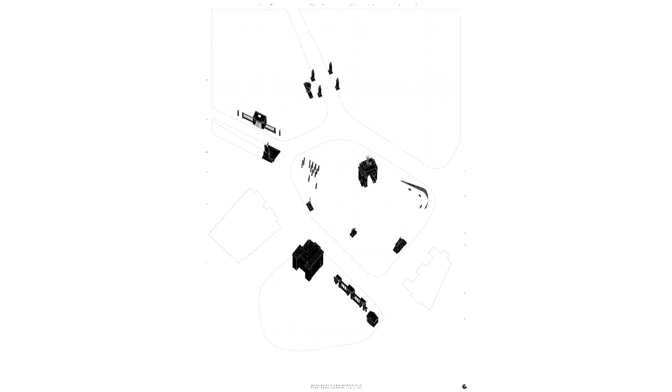So my project is called the Centre for Public Integrity. It is an addendum to existing monuments of the site of Hyde Park Corner. The public building is at risk of disappearing from London. So what I am proposing is essentially a monument to the public building that starts to associate with the monuments of this site.

It is a bit inaccurate to say that my proposal is an addendum because I don't have any past work to lean on.

And what I have done to kind of justify why it is an addendum is, first of all, I've kind of appropriated some citizenship as a Londoner, and I'm arguing that whenever I'm operating in the public space, I can to some extent be credited as an author because I'm on a regular basis contributing and shaping the community that I'm in. So I have some kind of authorship over the public sphere.

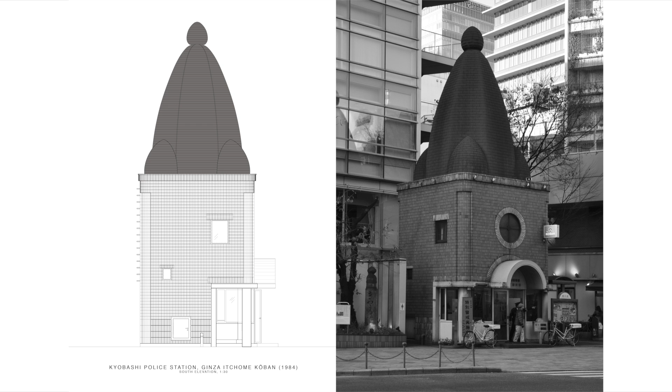The second point I'm trying to make for why this is an addendum is because, in its shape and form, this building, this monument to the public, is very much related to research I did in Tokyo in second term, where I looked into a certain typology of small police substations that are kind of omnipresent in Tokyo, and that are more than being police stations carrying out the role of policing, of surveillance.

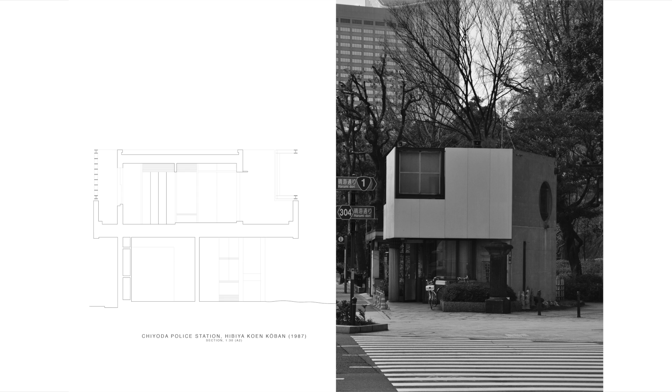They are signifiers of public space, and they are constant reminders for the Japanese citizens of a thing called public territory. I'm very influenced by the eclecticism of the Koban.

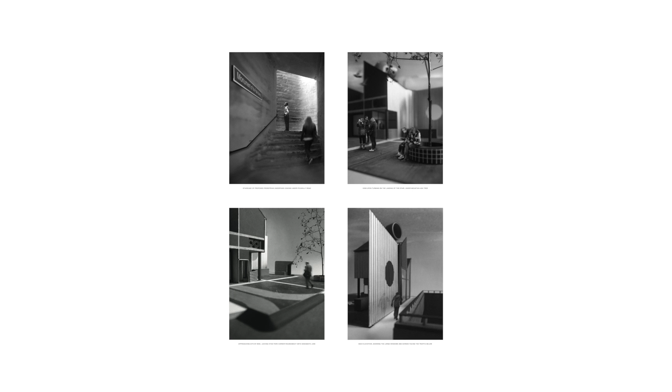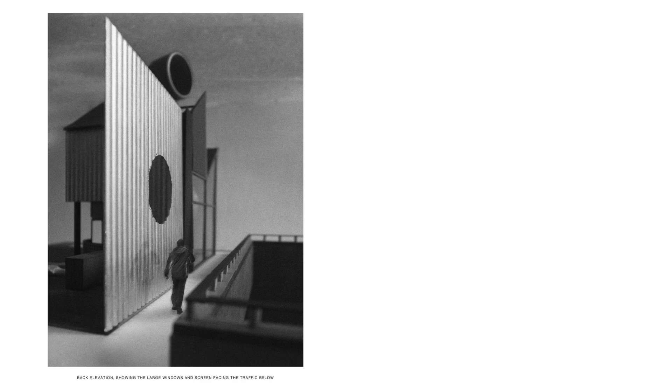It's a way of framing this site using building components, in a collection of monuments that are commemorative of that which is disappearing.

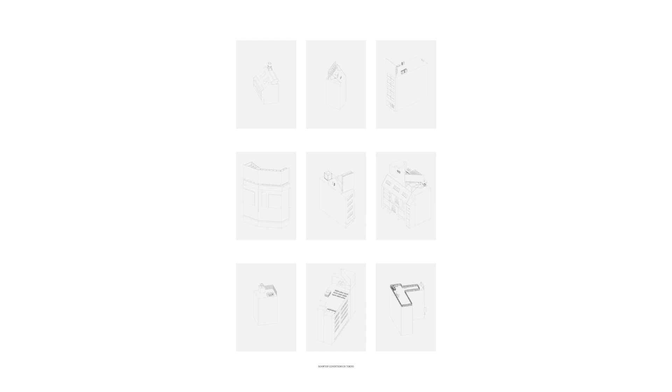So in Tokyo, I was looking at these billboards on the rooftops of buildings, and I call them hats, because when you add a hat to a person... can I borrow your hat?

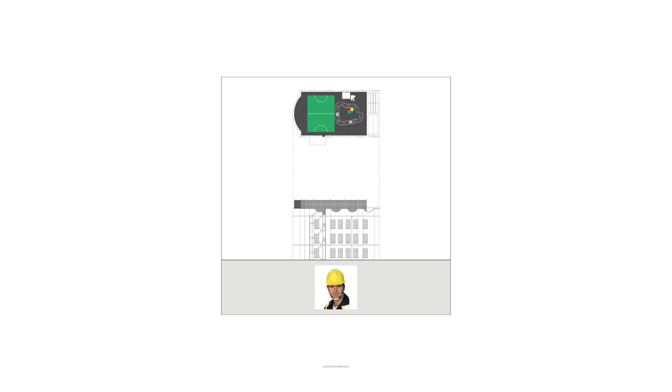So in London, I don't have one specific site, but I just looked into the rooftops, which I then add a hat to, to activate the existing building, which is very ordinary and has got no character.

But by adding a hat, they become something else. So my addendum is about activating the existing, giving a new meaning.

For instance, the bakery building is in the shape of a cigarette box, and people think, why is the cigarette related to the bakery? And this weird association leads people to somewhere else.

My whole project started with the quote from Hawksmoor describing London as an ugly, inconvenient, self-destroying monster. And I thought, it's not really a matter of questioning whether something is ugly or beautiful, but nowadays it's more about if things are worth talking about.

So my hat is a device that generates a conversation.

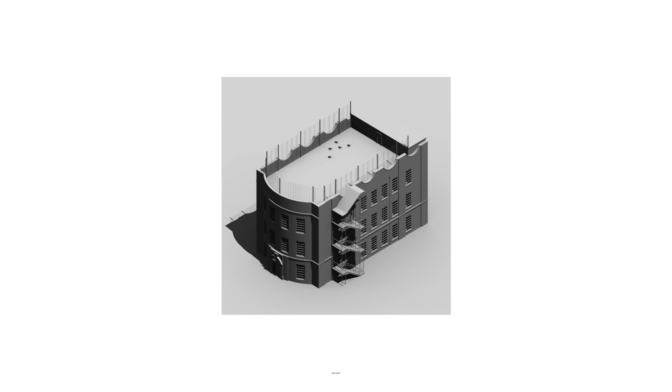But what I found more interesting about them is that because there are so many of them, the majority of buildings have hats, so they form this group in the city. I saw two different buildings which had the same advertisement on their billboard, and I thought, are they somehow related in terms of what they have in the building?

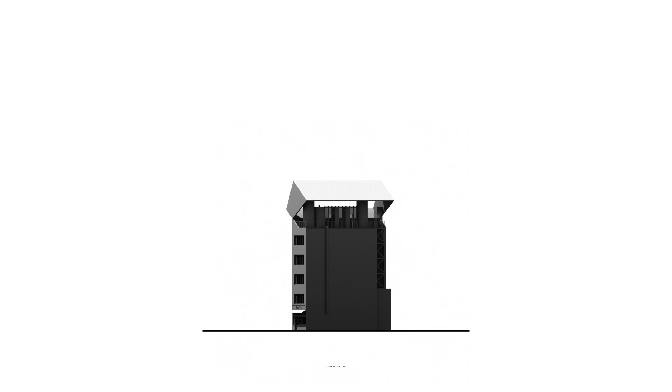So in a way I did the same in London, where I created not just one hat, but a series of them, so they formulate a link between them because all of them are in the shape of a recognizable product.

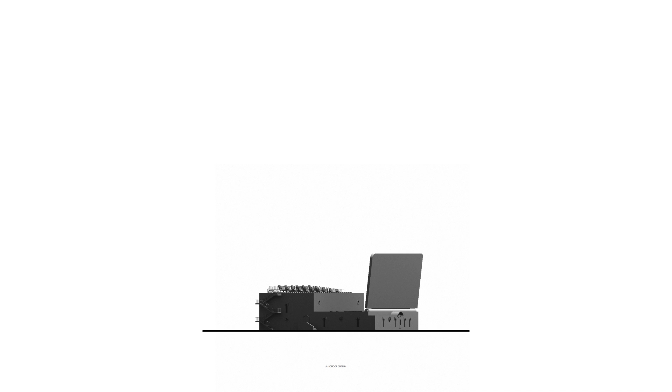So these forces are joined together to fight against St. Paul's Cathedral, which is kind of like a king in London. It dominates the entire area with its regulations.

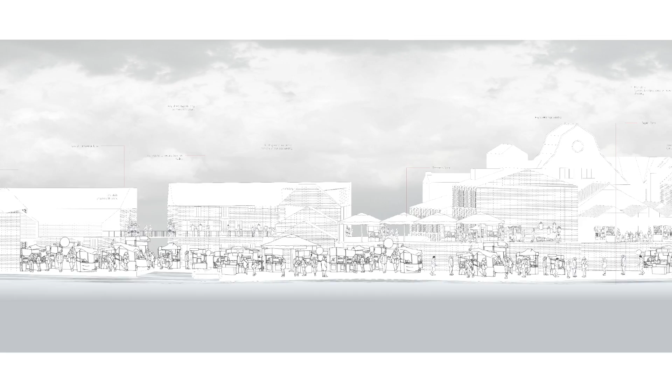Okay, so my site is the Camden Market, mainly Camden Lock Market in Camden, and this is the start point, the Camden Market is born. That's the root of the Camden Market, and I'm focused on the current situation of the market in London. It's like copy and paste, repetitive conditions, so they're exchangeable.

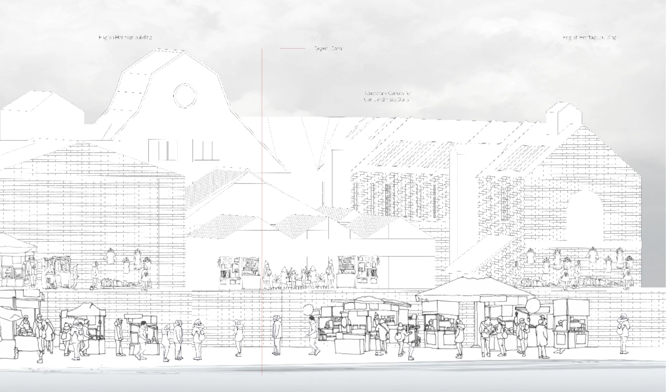So I want to give a specific character for the market. Mainly they disrupt the market character by the stall, so my idea is removing the stall from the market. Removing is one of the key points of my addendum, and making an empty square where the stall used to be occupied.

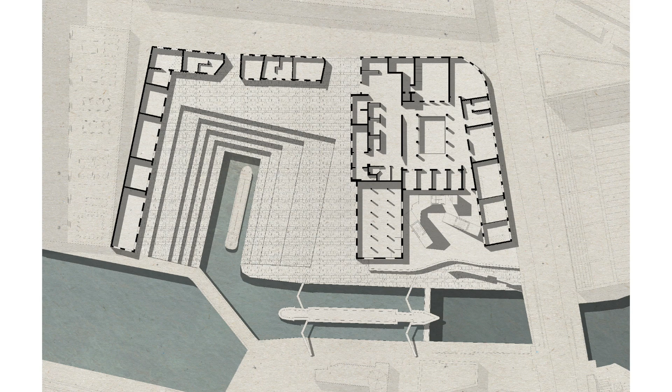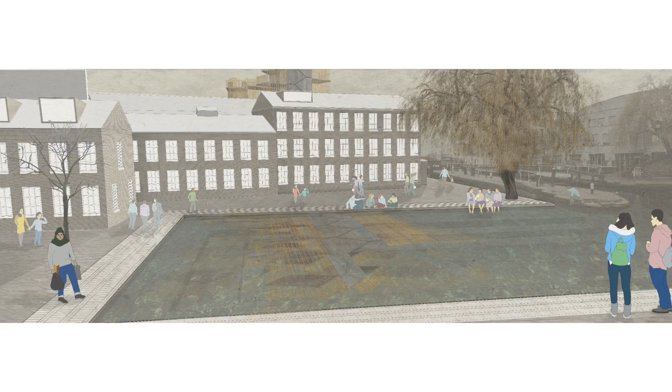I replaced the stall into the tiny empty spaces which they didn't use, so I'm reusing the empty space for the stall. I'm creating a tower for the stall, which exists on the Camden side, and also making a square returning the empty space to the Camden residents.

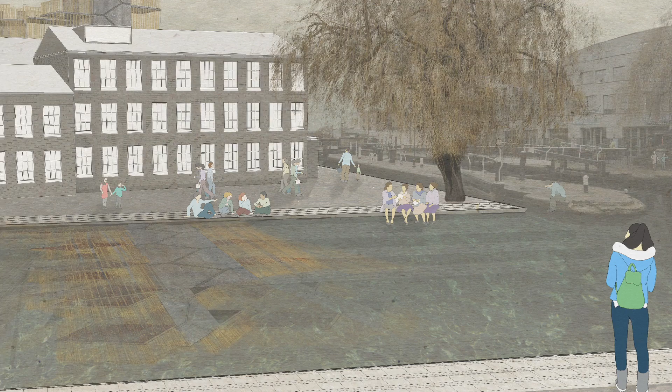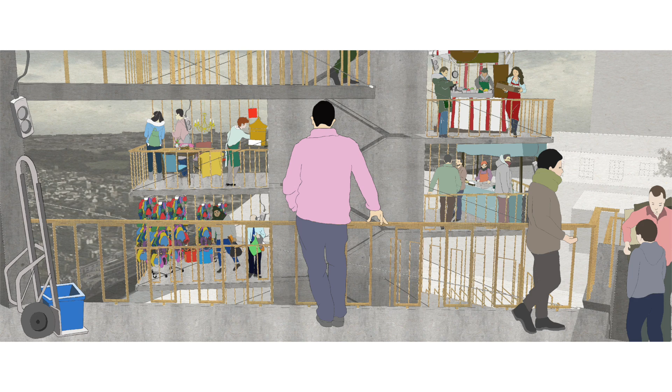The stall tower actually brings all the market activity into the tower. So mainly London market is a horizontal market, but I make a horizontal market turn into vertical. It's a vertical condition, but it clearly has the outdoor market condition that London markets usually have, so they can feel the weather, like rain and sun, and also see day and night time. Then they can attract other stores on different floors, bringing all the market conditions into it.

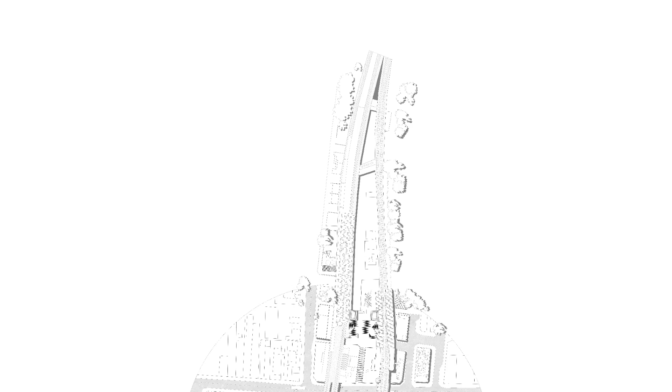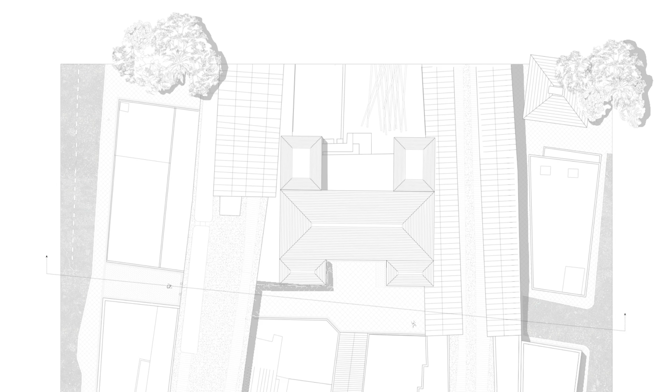My site is Peckham, and it's the enclosure of the viaducts which encloses the station, Peckham Station, and I'm taking the station as kind of a pulling machine for people to come into Peckham. At the end I demolished a building that was in front of the station to give the area more space. Which is funny, because at the beginning I was finding the difference between addition and addendum.

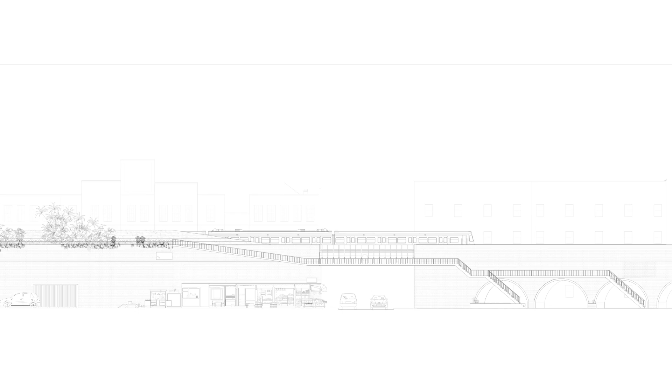So I was always thinking about the addendum as an addition in that sense, but at the end I figured it's more of a theory, and the result that comes out of it is the addendum - so me giving more space to the people.

So I think from the old building that has been there, taking the staircases and forming new connections to the Peckham Coal Line, which eventually would then go to Queens Road.

For example, I had the example of the Reichstag in Germany, where the dome has been renewed, and I see the renewing of the dome as an addendum and not an addition, because it's adding another function to it, for people to have another view inside what is happening.

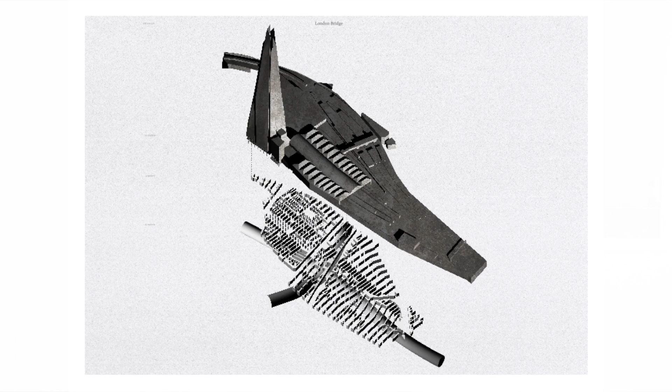What I'm then altering is simply the program and the architecture that sits on top of that. One of the most important components of this addendum proposal is the aspect of time and the arrangement of different programs based on their endurance.

The two biggest changes are how you move at two different speeds. There's a ramp, situated directly next to the escalators, that either allows you to enter or exit, and this ramp begins to circulate up through the 7 stories of the building.

In addition to this, there are also express cores, which then allow someone who has a particular intention, for example to visit the cinema directly, or the workstation directly, or something specific. They are then allowed to move much faster through the space and have to interact with less.

On top of this, the arrangement of the floors has express and shorter endurance elements programmed to the bottom of the building, because it wouldn't be worth your time to go to the top and back down just to get a newspaper or coffee, whereas you would go to the 8th floor to visit the gym, go to the nightclub, or enter the hotel core.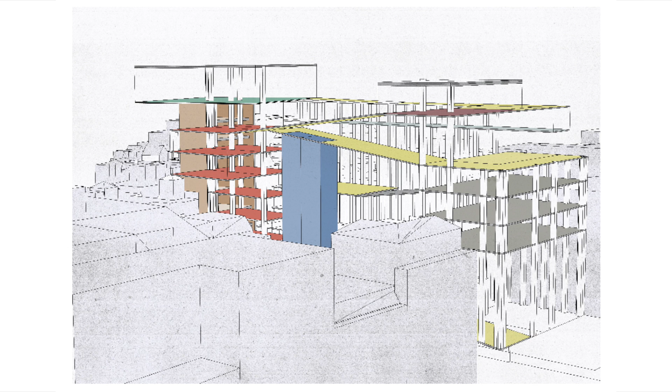So there's this variety of elements that are constrained by elements of time, speed and endurance, and programmed throughout this space.

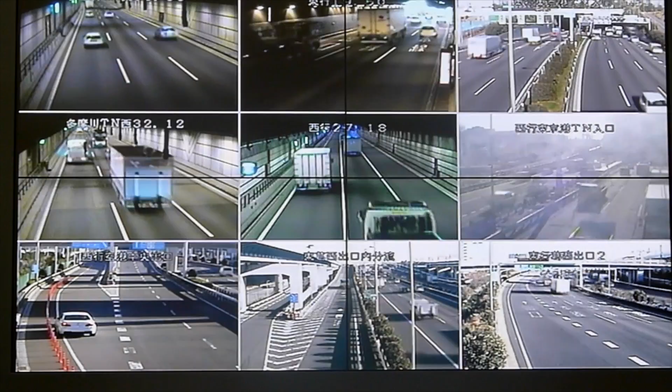In Tokyo, I was quite attracted by junctions between different types of infrastructure, and the way these confluences come together, the treatment of these junctions, and the effect it has on the commercial and residential buildings that surround the junction. So my three cases are Sangabashi, Ginza, and Shinjuku.

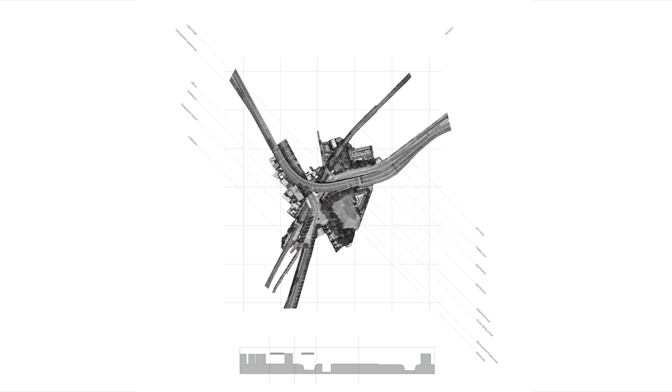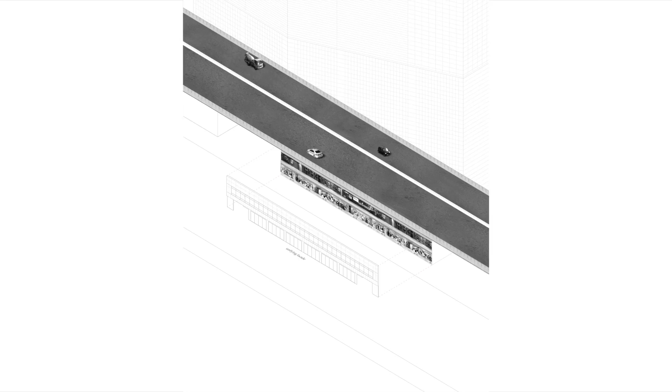My argument is that in the situation of conflict typified by Sangabashi, we end up with spaces which are much more generous, whereas in Shinjuku, for example, there's no such thing as a normal level ground plane, and everything, the materiality of the spaces and the nature of the spaces, are all normalised. They become the same.

So the proposal is an under and overground railway station which serves to activate a true public space on the South Bank. The station is a singular point where different infrastructural systems collide and produce a large void, a pocket of low pressure on an increasingly dense site.

Above is the Southeastern Railway, below is the Northern and Bakerloo lines, and on ground level you have the South Bank itself, the ground plane. So you have these three different scales converging at one point: the national scale above, the London scale below, and on the ground something very local — Royal Festival Hall, the Shell Centre, the market, etc.

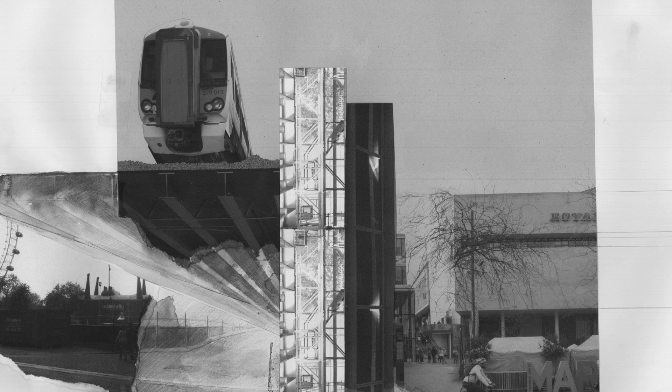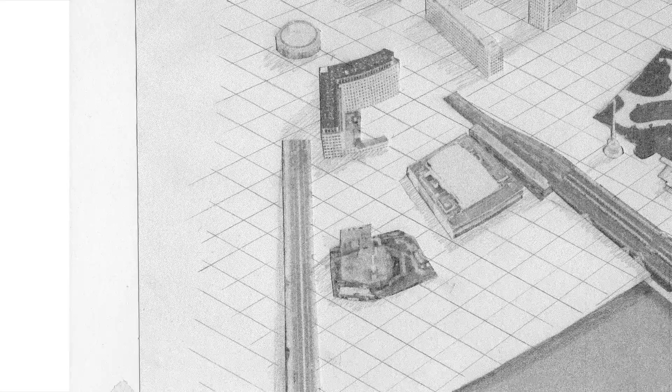The idea is that the status of the public void as an integral infrastructural core is a kind of strategy so that it is inherently resilient to further privatisation and development. The project is moving to this site, which is ambiguous in ownership, to really activate that lingering sense of publicness which the South Bank has slowly been losing.

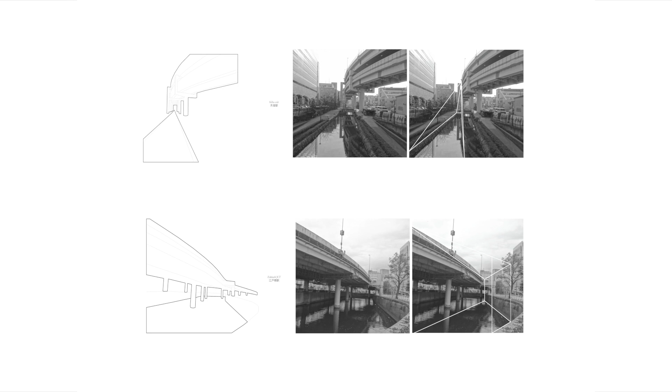Basically, I'm working with a highway, and what I did is insert the highway into central London, following the line of Regent's Canal.

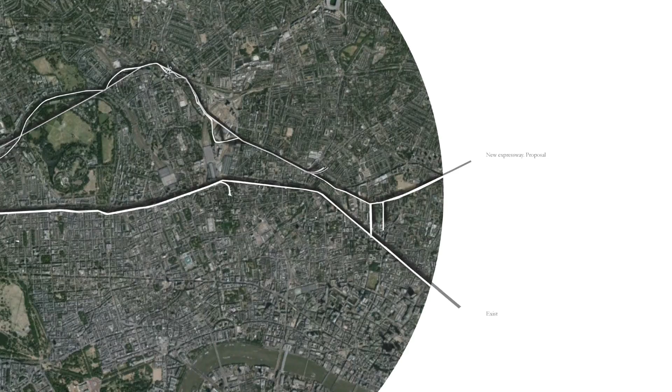But the most interesting part is the places which don't fit to the canal, because there are collisions with the actual city. So at this scale, I start looking at how exactly it affects the city when the expressway collides with the city.

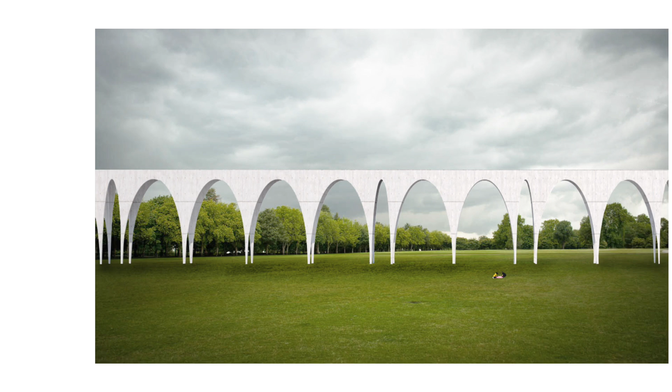For my design, I wanted to have a continuous shape, so that it could create a recognizable element in the city. But I did change it a bit with small arches, which could adjust the place where the base actually sits.

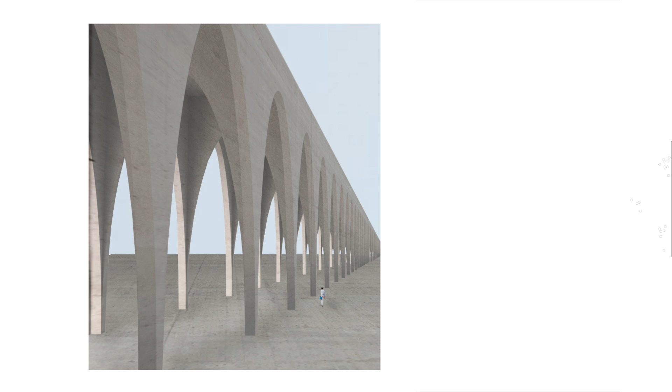I think it's a pure addendum — something that this insertion could create. First of all, it enhances the city because it helps the traffic, the time on the road every day, which is a real problem in London. Second, it's affected at every single scale, in an urban scale, in an architectural scale, and the insertion is just a pure addition to the city.

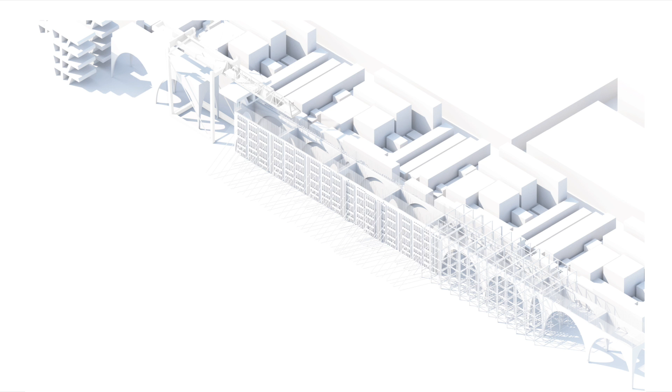My site is Oxford Street. I chose it because it was a comparison to the Harajuku-dori Avenue in Tokyo, and it's two kilometers long. It's built with shops, as you know.

What the addendum does to the site — the purpose of the addendum was to be so different from the site in materiality and form, to be completely different from the host, which was the site. So to be something that could be completely distinguished from the host in that way, and also to respond to an omission in London. That was the purpose of my addendum.

So what the addendum does to this site is first of all fill a gap which I think is in London. My mountain responds to the omission that there are no peaks higher than 98 meters in London.

It basically transforms the city and the site as well, the addendum. It blocks Oxford Street completely — the mountain completely blocks Oxford Street. Oxford Street basically doesn't exist anymore. So the site dissolves into the addendum completely.

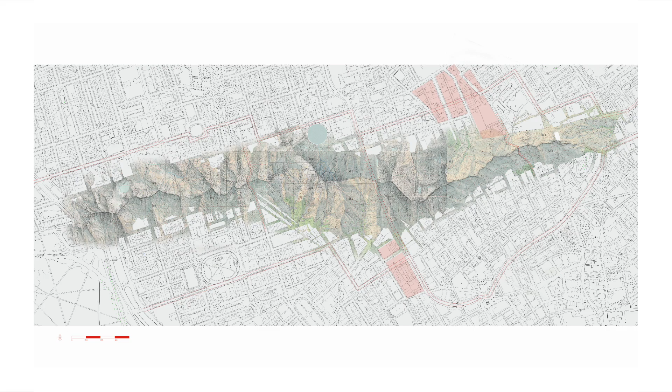My addendum is so big that it affects the city overall as well. So I can't say it just changes Oxford Street in a way — it really changes the whole area of London, transforms the city. To me, an addendum is something that's separate from the host, that can be distinguished from the host completely. That's why it's a mountain, because it's so different from the context of London that anywhere it would stand out.

You wouldn't be able to say, okay, where is the addition? You know that this is the added part. So I can't say that the buildings around it are additions to the mountain. I think the mountain is an addition to the city completely.

I say it dissolves. I think Oxford Street disappears into the mountain completely, but I'm not saying that. I'm saying something completely against this, that in no way my mountain blends into the city. It's completely standing out in the city.

The mountain represents something that could take you away from the rationalism and materialism of the world. That's what I actually learned from Bruno Taut, that the mountain, he thinks mountain can do that.

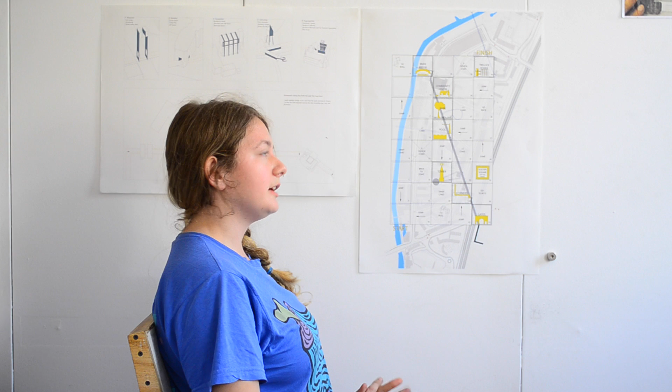So my site is located in Notting Hill, that is closed off by the train tracks and the canal, and which actually isolates the whole area and makes it really undeveloped and completely unusable, most of the area.

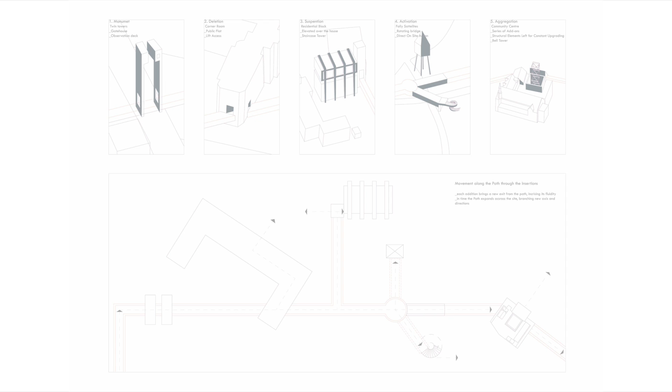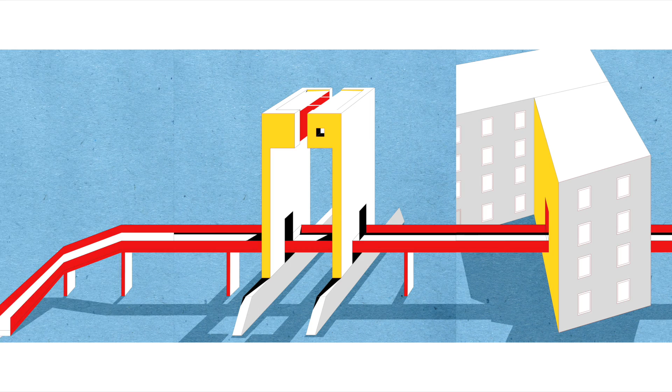And my addendum is actually the insertions that will bring more attention to the area but still keep its autonomy, which I decided to make through layering out the system, the grid, which eventually developed into a game to position those insertions. So the insertions happen, the addendum actually happens randomly without specific reasoning for it, although the game still controls the ways and positioning of them and brings the reason justifying the addendum to happen.

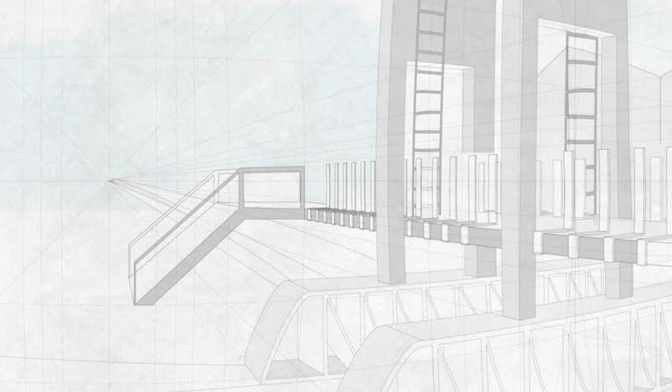What is also interesting is that these additions rely on the materials and elements that exist on the site, so I'm not taking any other forms but only those that are already in this archipelago. And the addendums that I'm proposing for those, they're not really finished ones, they still allow for future development, progression to happen.

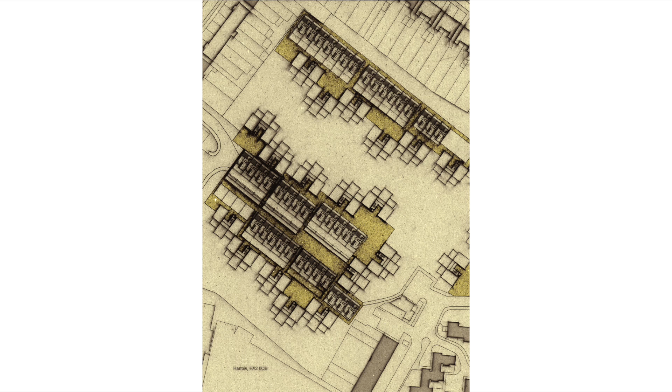My site is in Harrow, and I was dealing with the regeneration of a housing estate. It's one of the many housing estates in London that was announced to be demolished. Housing estates in general was a typology that I was dealing with - that was my understanding of Addendum.

I chose to be - my understanding was Addendum as a repair. And council estates as a typology, I believe, is a perfect architectural example to practice this architecture of repair on.

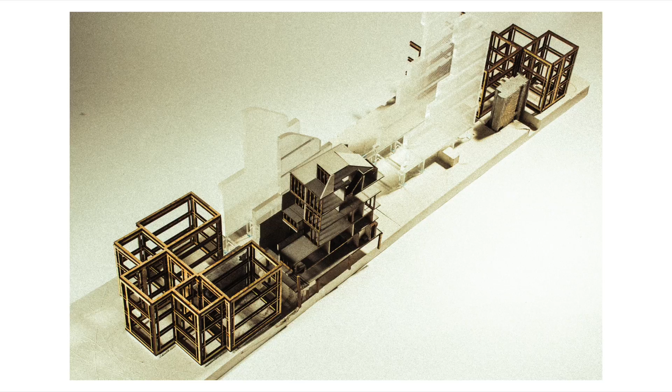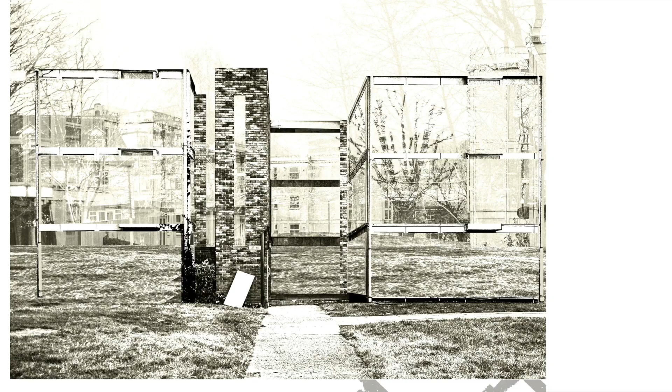In this case, my Addendum is very site specific, because why I was very keen on taking this project in Harrow - as of the many houses there were, I could see that the community living there clearly expressed that they would like to stay. They didn't want to be rehoused, and I think it was really worth fighting for, especially for this estate, for the social value, the sentimental value that it had.

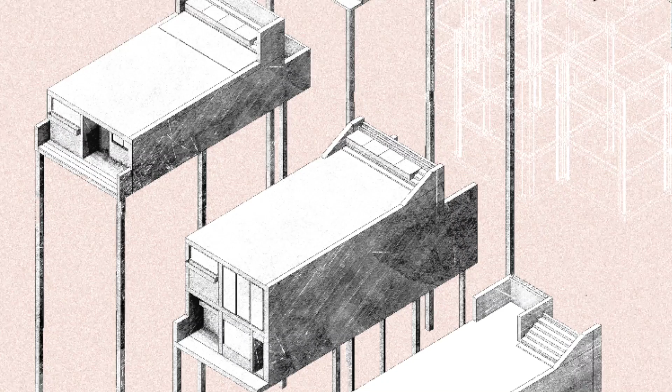And it's quite nice that you brought up the idea of modular, right? Because I treated my repair as the repair of the concept of a house. So I imagined that each flat - I started designing a flat, not the whole estate, the whole individual flats.

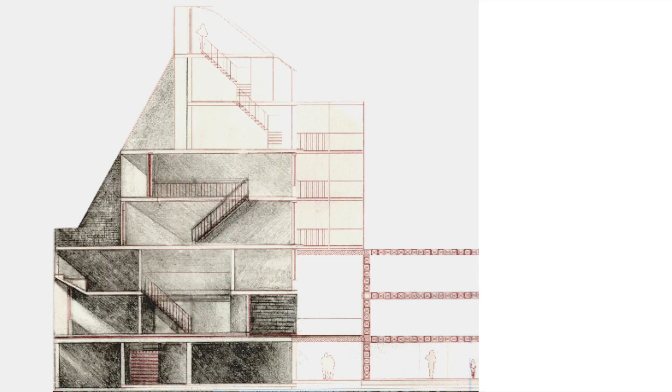And I asked myself what constitutes a house. For me, it was the garden, then it was a staircase, the occupation of spaces vertically as much as horizontally, and then it was the front access that is kind of stepped back from the street, right? So each of these, my flats had to apply these conditions.

Addendum as a repair - when I say as a repair, I'm not actually interested that much in the physical repair, right? That would mean filling the cracks. But the repair is more like the new added value, the restatement of value of something that we thought had lost its importance.

So in Tokyo, every building is freestanding and they're independent, so they can be demolished quite easily.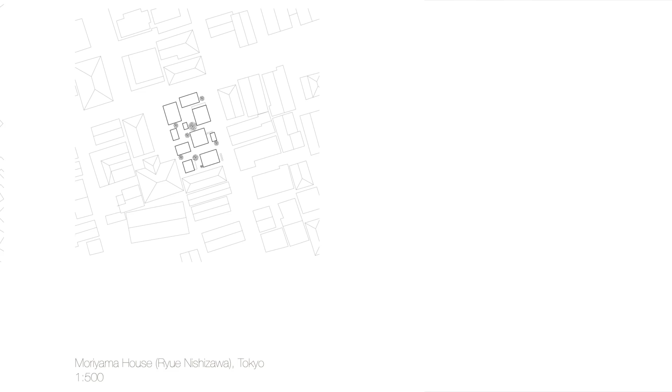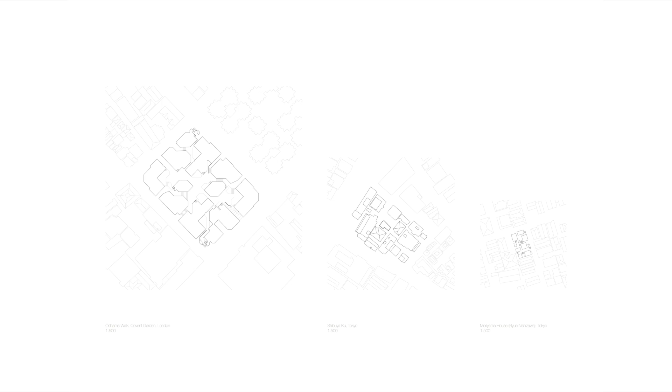So the way they are built, they can choose wherever they want to face, the orientation, and also how to enter your house. Whereas in London we have all the entrances facing one side. So the transformation of a block makes all the different choices for people, like different ways to enter their houses.

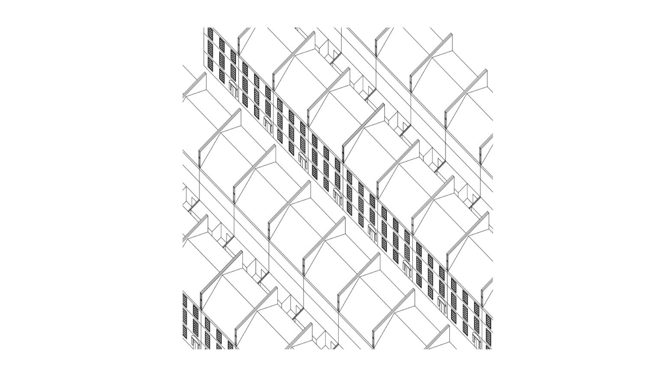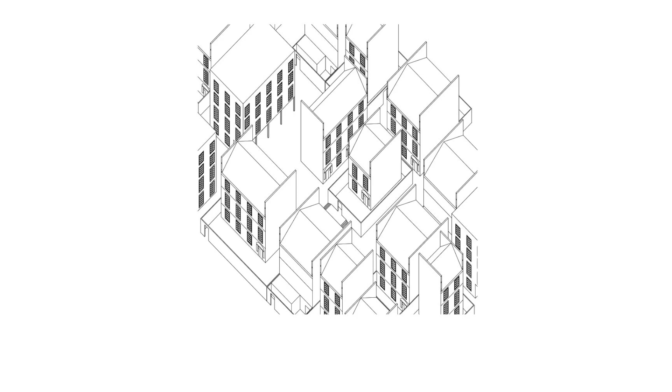Through time, new buildings get added to the place, filling in the gaps, and that's when we have this addendum moment. The new building will communicate, negotiate with other buildings. That's what makes Tokyo blocks so interesting, and I want to do the same to London blocks. So we don't really have gaps here between houses.

We have party walls. If we imagine London as it was built without party walls, London would be transformed into another condition, and we'd have free, independent buildings, and then we have this transformation going on.

What I did in these two blocks was try to find a better circulation for people from two different sides, and tried to see how to penetrate and give them a better path to go through these two blocks. I used this as the way to divide the blocks and subdivide it, so you have smaller houses filling the gaps, and little alleyways inside these two blocks.

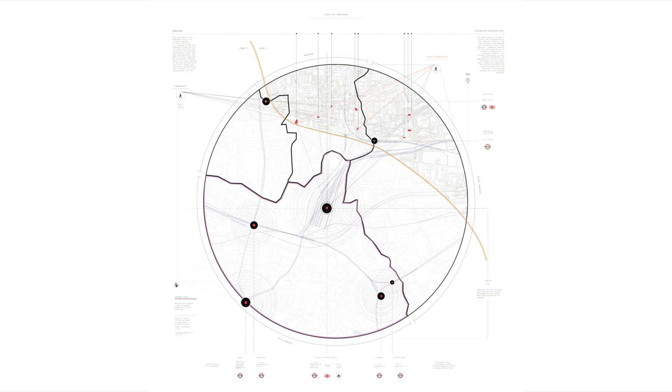The site is very specific, and the way I chose it is directly driven from how the manga cafes were located in Tokyo. So I looked at a site in the proximity of a main working area in London. My addendum, in a sense, is a new typology of housing that exploits these abandoned buildings.

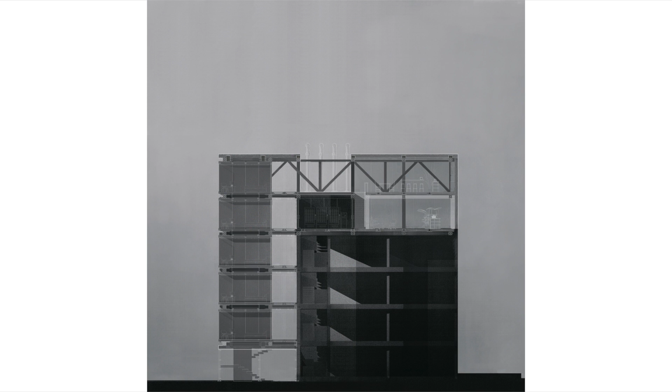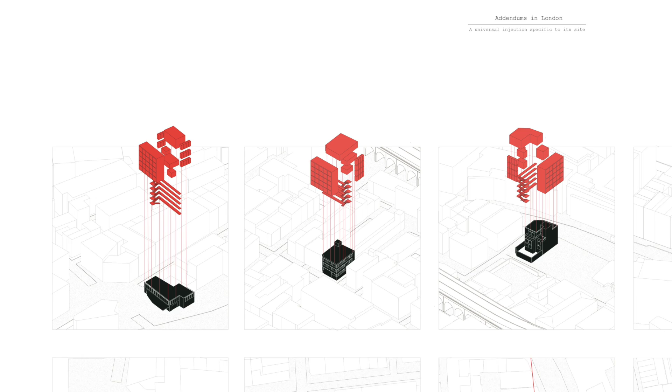But I'm aware that the 8 additions don't solve the problem of housing in London - they're just my idea of what the addendum should be, a message. This structure will clasp temporarily onto the buildings, and go away in probably 2-3 years when the landlords utilize this building, destroy them, build something else. If the system I designed would be applied in other circumstances, it could also be clasped on normal buildings.

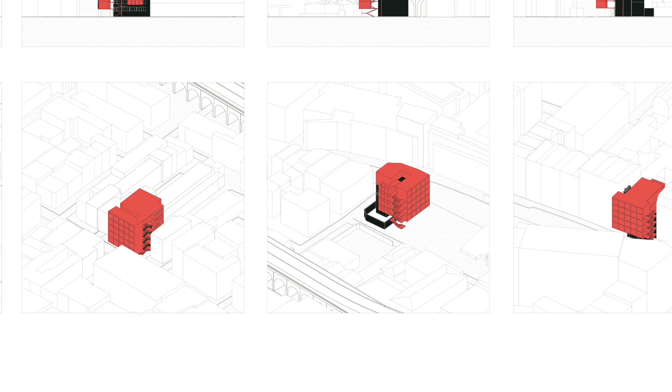So in a sense, it would be valid for every single typology of building, because the idea is that you preserve the site, the value, all the aspects of the site are preserved, and it's just clasped on top using its infrastructure. Like in the Tokyo pole, what happens is you have a universal structure that can be plugged anywhere, which is the concrete pole, and then the real addition is the elements that come onto it, which are specific to the site.

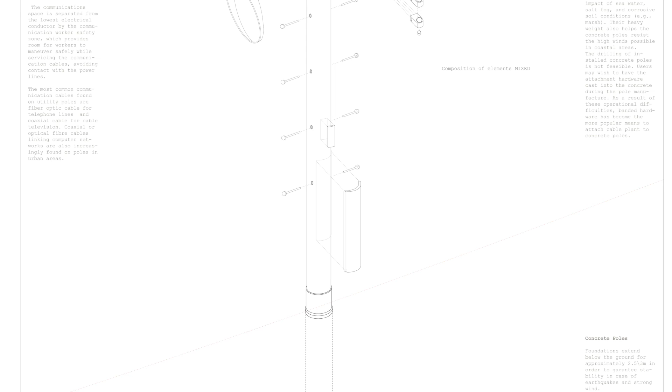So in a sense, all the poles appear similar, but they're all specific to the site - some will have more transformers than others, more cables than others. In a similar way, this happens with my addendums. It's a universal structure that adapts to different typologies of buildings, but it's modular, so it would replicate and offer the same services - like a repeating standard.

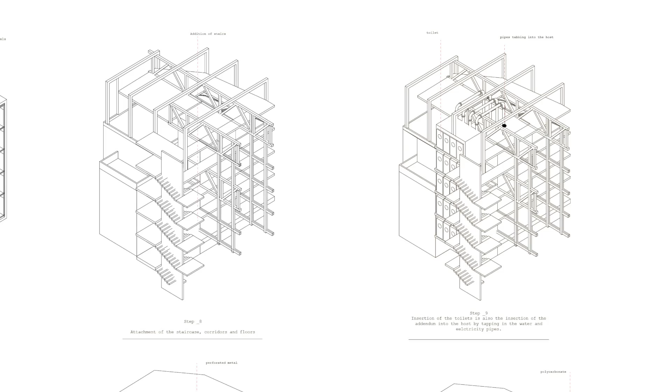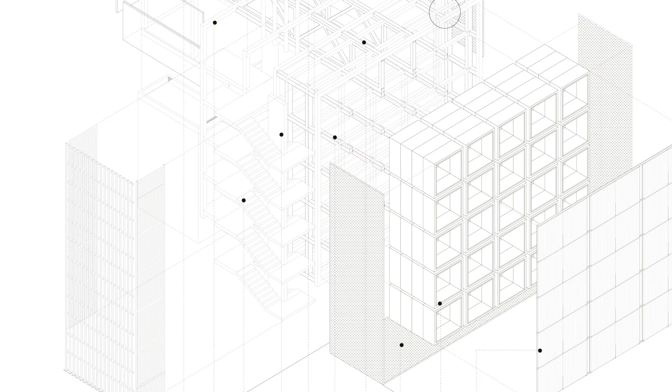But at the moment, I worked roughly on 2 sites - I mean, I worked on all my 8 abandoned buildings, not too much into detail, but I worked into detail on 2 buildings. Classic modern buildings with columns and flat roof. Both have the aspect of having a completely empty partition wall, which for me was very useful, so that I could plug my whole facade.

But I'm sure that the interesting part would come now that I've developed the system - what would come after is how I would adapt this system to more intricate situations, because that would start creating variations in my system, which would create probably more interesting situations between the addition, the site, and this new composition.

It shows a new solution for living, so this is more related to the block, because it exposes now the life of the building, so it's no longer in a derelict condition.